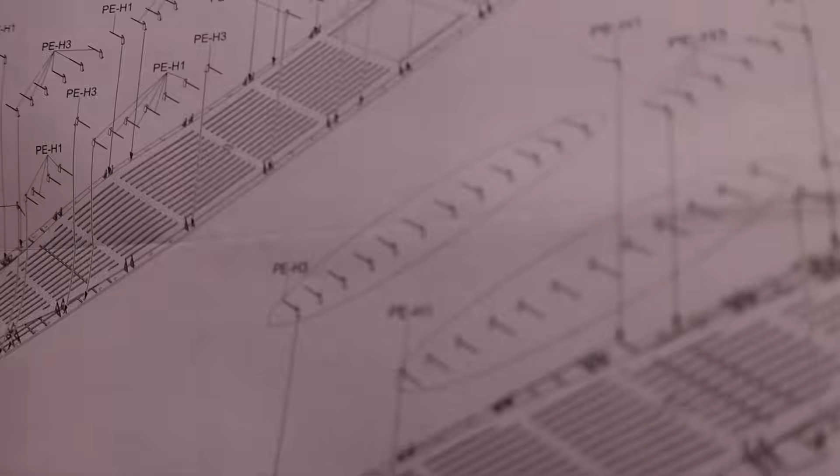And then also these right here are all supports for the nets. There's a photo etch net that goes all the way around from front to back on port and starboard side of the flight deck. These pieces are the support pieces for those photo etch nets, but they look really, really fragile, so I do not wish to get those in place either. Great big clumsy hands would probably start knocking pieces off as soon as we tried to handle any of this support structure.

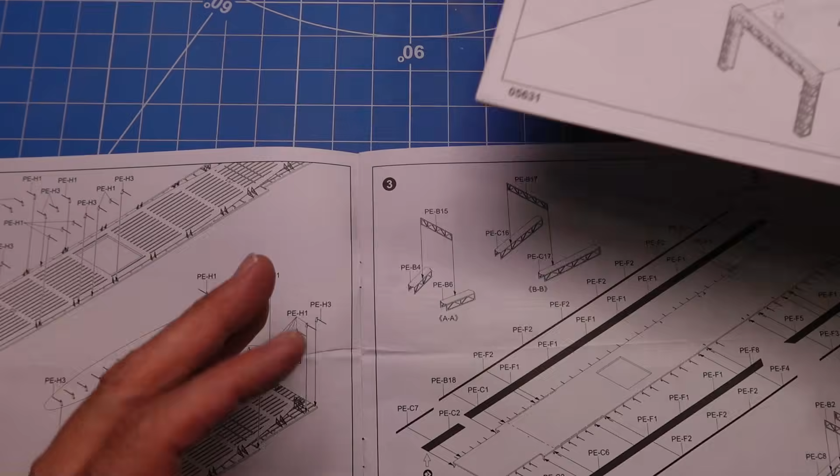So what we're going to do is dive right into getting the plastic support structure put together. Then we're going to start working on some of the photo etch support structure as well to measure against the plastic stuff. In the meantime, we're not going to do any of this stuff just yet because I need to put down the wooden deck piece on top of that.

One of the other things we might be able to get to is some of the superstructure, deck houses and stuff like that while other bits are drying up. So sit back, relax, maybe grab a favorite beverage, and we'll see where this video takes us.

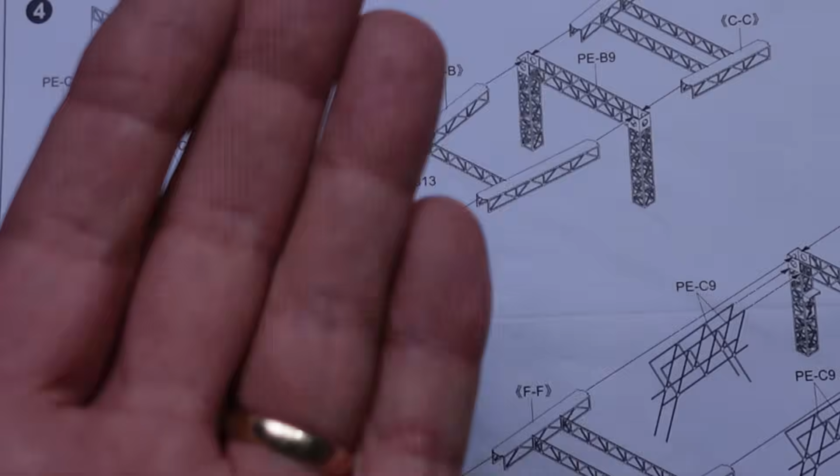I can see where maybe a little cleanup needs to be done here and over here with the higher resolution. But at any rate, what I normally do every time I've done photo etch is keep that little etched hinge flat against some bottom surface and fold everything up on that. This part doesn't really have any problem doing it either way, but once I start doing it, you get different looks depending on whether you fold it up or down.

So if we have a look at another photo etch piece that hasn't come into play yet, you can see there's some etched in detail here. If I fold all of this up, that etched in detail is going to be on the inside, and the only thing we're going to see is this and some weirdly randomized holes through it. So we definitely would like to see that etched detail.

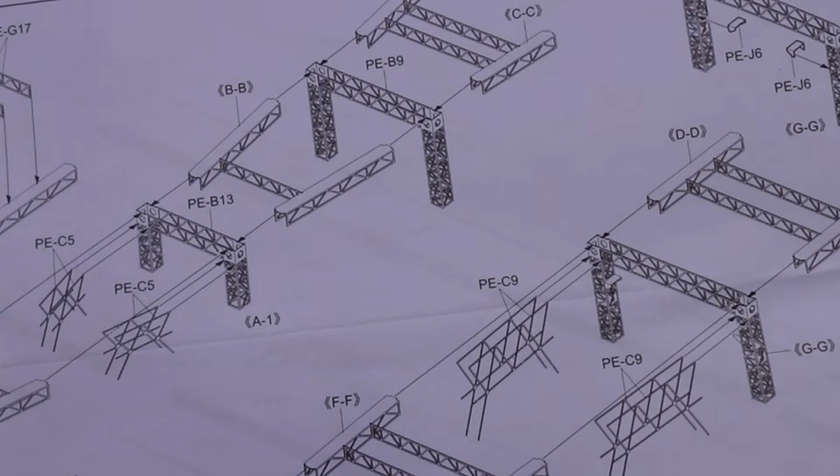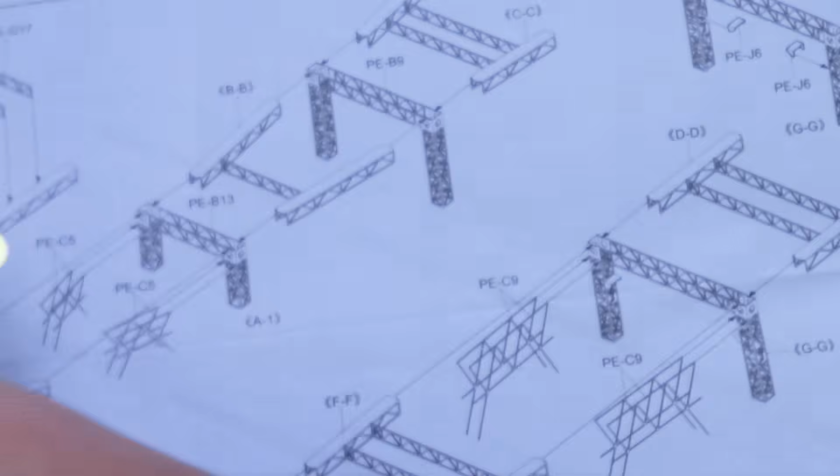So I'd be interested if anyone else has done this, how they went about it as far as which direction they folded in, and if I'm just crazy and I've been doing it wrong all my life. But I'm going to go ahead and fold down instead of up, which is counterintuitive, because when you have those little folded etch hinges facing up, it's a lot easier to see in your photo etch tools. At any rate, we will do one off camera and one on camera so we can see what it all looks like.

I might attempt to solder this - I've heard other people, in fact that was one of Jim's suggestions, with soldering I believe. I might try soldering, but soldering and I have got a complex relationship. The whole process of it is not very fond of me at all, so I definitely try to avoid soldering when I can.

When we start off doing this here, I just go in with this Tamiya photo etch bending tool, just a handheld bending tool.

This is just how I'm doing it. This is by no means a tutorial on how everyone needs to do it. And I would imagine there's probably some out there that, like me, were a little puzzled about the direction of the folds here.

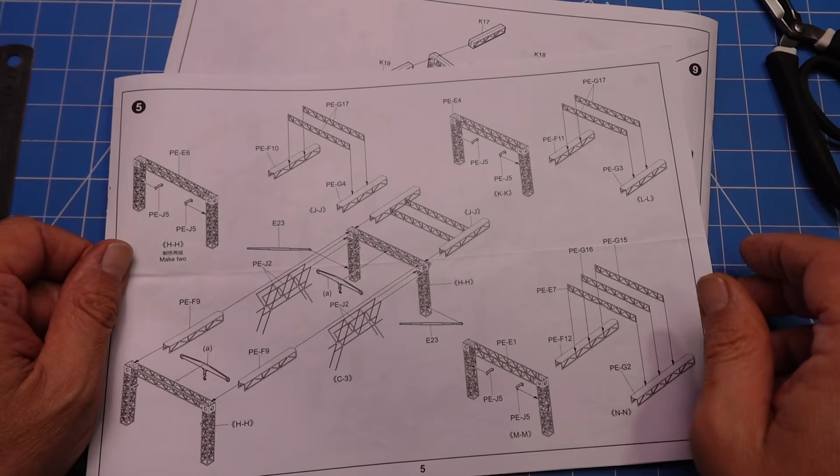So that is, I think, going to be a wrap for this build video, number 3 of the USS Langley. Moving on, of course, there's a lot more soldering work to go, hooray for that. But some of the other things we're going to start touching on, while I'm doing some of that soldering in the background, is getting some of this superstructure put together and knocked out.

Additionally, yep, back here, I missed it on page 9, I've got to get the rails for these overhead cranes put together. These right here, these rails, are actually what go on these little bits right here that I had to replace the photo etch with plastic for.

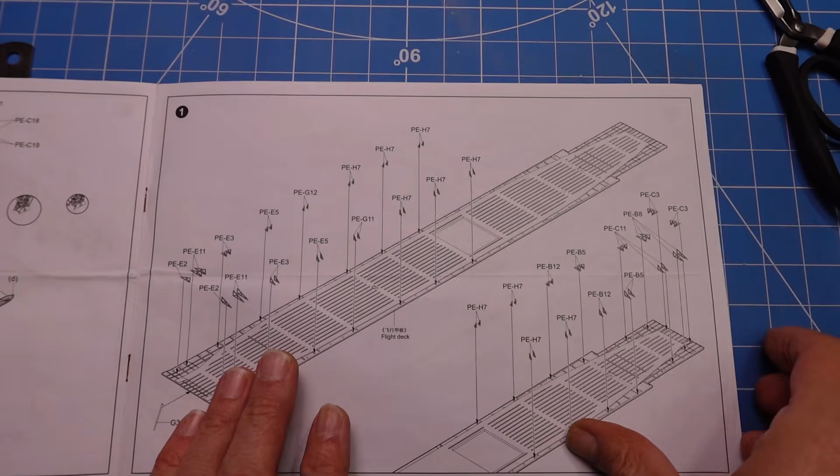At the same time, eventually we've got to get around to tackling the deck here, which is back here, so we've got a lot more photo etch to go on the deck. Luckily none of this is soldering-wise. But my hunch was correct in that all of these little pieces of photo etch, these little gussets, are supposed to match up with the columns on that support structure. So I'm glad I waited to put those in, I want to make sure the support structure goes in place before I put these on, to make sure everything fits down the road.

But that will be what we work on next time: more soldering stuff possibly, superstructure, and maybe we'll start to work on the deck a little bit. And that will be build video 4. But until that time comes, stay safe and happy modeling.